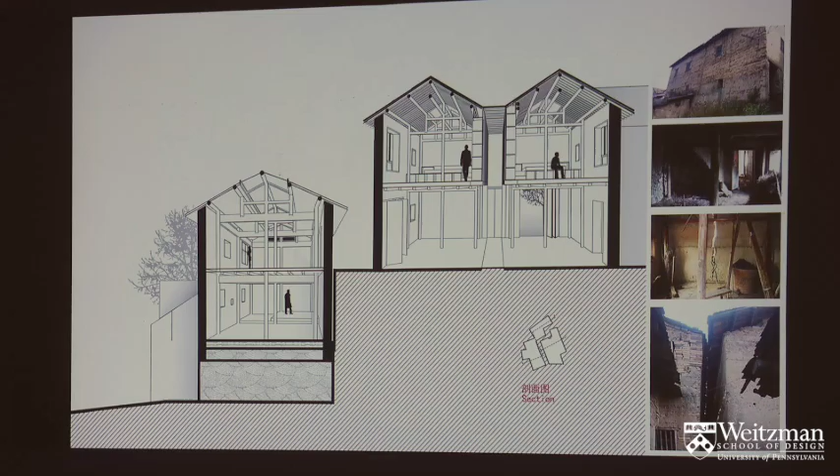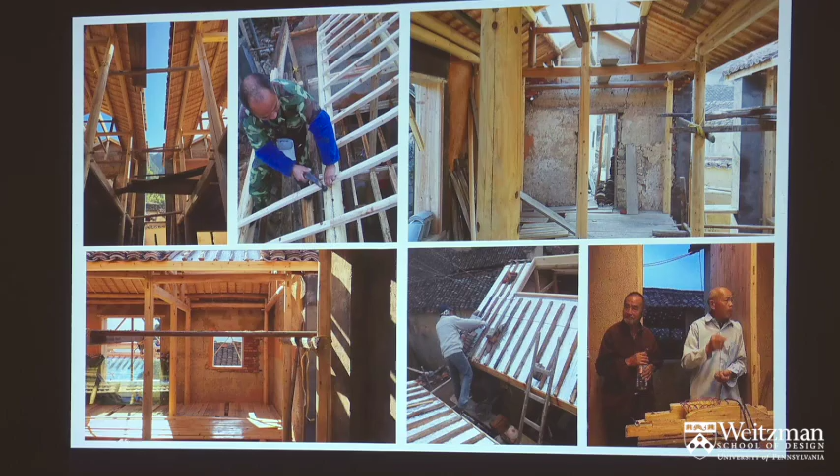So the community decided to demolish, but we made a counter offer to the county government with a new design proposal to preserve this cluster and change the interior, to reorganize it into a community space, into open space, because this traditional tenon and mortise timber structure allows flexibility for reassembling the interior structure.

This proposal made by us was done very quickly, in less than a week. We made a design proposal and brought it to the county level to offer it as a pro bono design project, but asked the county government to subsidize and fund the project for this village community to renovate this cluster of buildings instead of demolishing them.

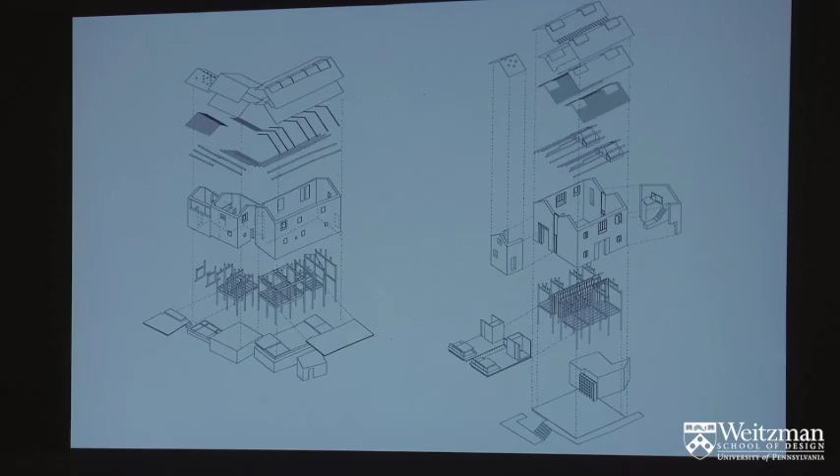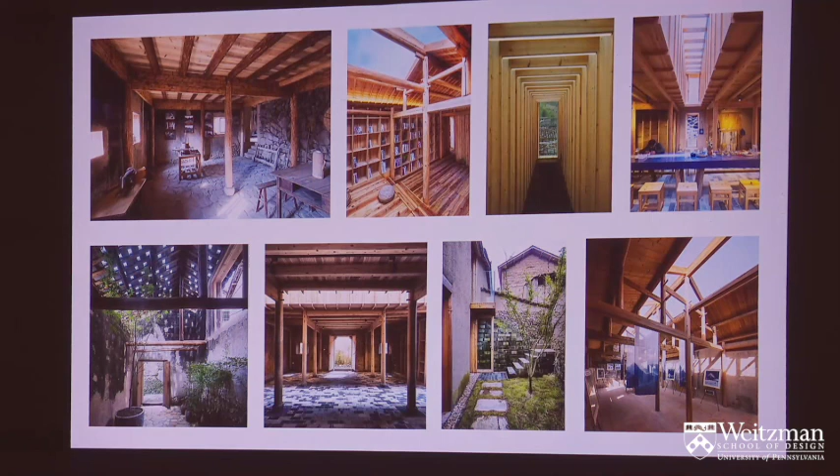The construction was done in the typical local building method, with the tenon and mortise timber structure and also with rammed earth, all local materials, carried out by the local villager communities. With this local vernacular building typology, houses are always built by the villagers and maintained by the villagers themselves. Everybody in the village can be considered a skilled builder or construction worker on this type of building.

This collective work with the community was able to reuse this cluster of abandoned space into a community space, a community meeting point at the entrance of the village, considered an important fabric of the first generation who arrived in this location and built their houses around 200 years ago. The upper floor, like some storage rooms, could be renovated into rooms for homestay businesses for visitors.

Later on, this building also inspired young villagers, two young artists returning to Songyang County from Hangzhou City, who started up this fabric dyeing studio in the Pingtian village.

This has become a very popular cultural and educational program locally in Songyang County, attracting children and visitors, especially young families bringing children for a weekend stay. These young artists also help local villagers produce their local crafts and sell them online with e-commerce platforms. So this village has become a very popular destination in the region.

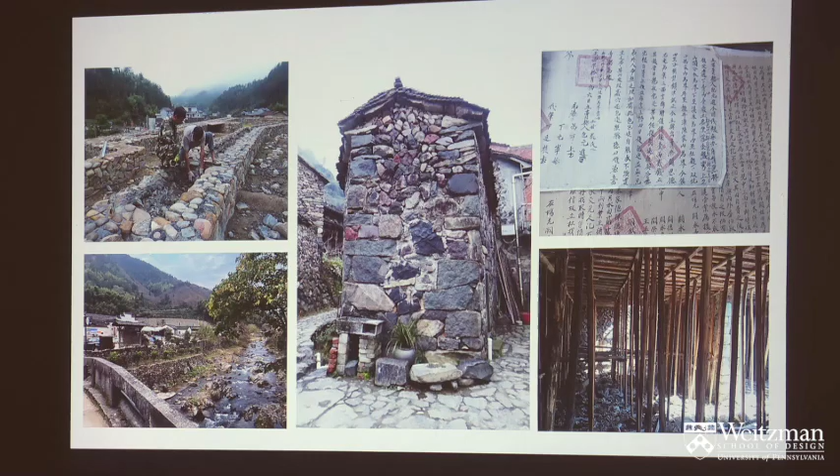Through this project to revive this long-lost masonry building technique, we were able to invite three local skilled workers. We could only find three workers with such building techniques, but through this project, they were able to train young villagers into masonry construction workers.

And the project also became a monument to showcase this Hakka indenture collection in the village. It's actually the biggest, the largest Hakka indenture collection in the entire nation. So this is very valuable local heritage and cultural assets as well.

But at the same time, it's also an archived document of this Hakka village's history and legacy.

So the space is conceived with the local masonry building techniques to work with the light, to work with the wind, and to work with the local environment. There's actually an existing creek on the site, and we include this into the space.

Based on local climate, it doesn't need to be a completely artificial space. It can totally open up to nature, to invite wind and breeze into the space, to let the creek run through the building. But it also creates an archaeological space for people to contemplate the legacy of Hakka indenture.

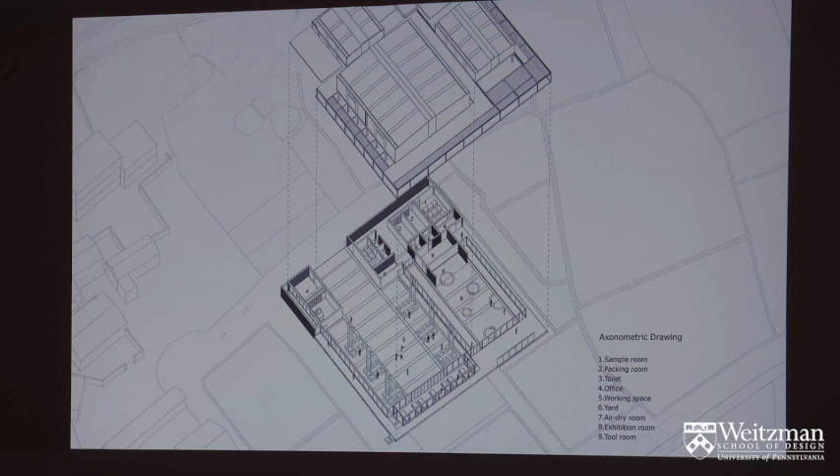So the idea to have a collective space, setting away from the village fabric, is to ensure all these issues can be solved with this new space as a collective space.

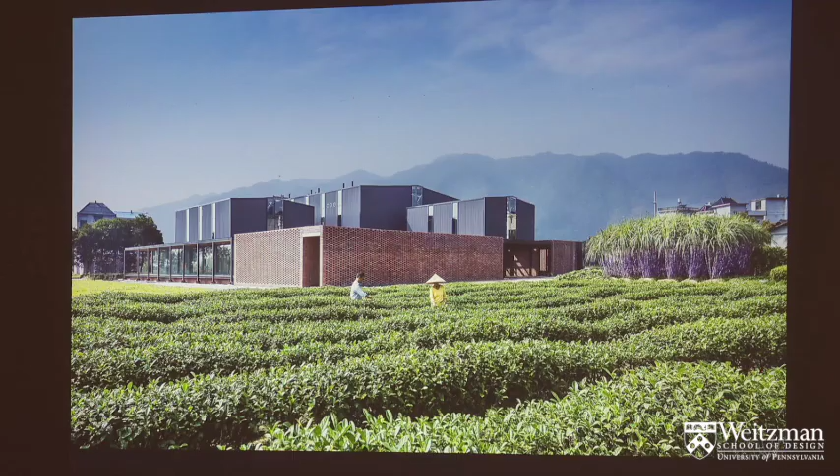And at the same time, it's also functioning as a community center to accommodate different cultural events. But what's the most important content happening in this building is definitely the cooking process.

This main central space is conceived as a central stage. The height, the sequence of the working stations, the geometry of the space, the layout of the chimneys are all decided together with these family workshops to identify how many family units are going to run within this space with such an intense production procedure happening in the winter season.

But at the same time, we also see that this is a striking live performance. It's a live museum to showcase the local traditional intangible cultural heritage. So this factory is also a live museum to attract visitors.

So now every winter season, I think it will start soon, in about a month or 5-6 weeks, they will open up this sugar festival. So the cooking will start again with this space running day and night, 24 hours, with 3 shifts.

And you can also see that this is a space where we also bought these uniforms online - they were $2 per set, we bought it on Taobao. Only for this color, making these cooking masters - they all have this. They are entitled as the cooking masters in the region, and become the actors, become the performers on the stage. And very soon they also become the local celebrities who are really skilled in this brown sugar cooking production.

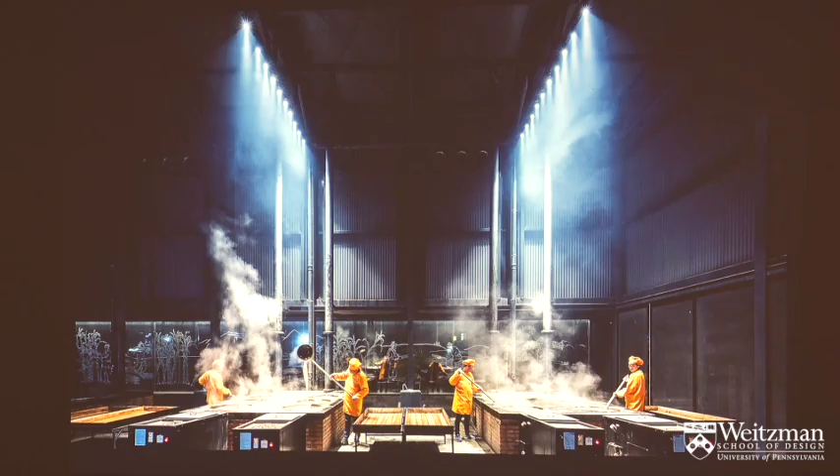So the space runs 24 hours, so even the lighting design is conceived as stage lighting. And together with the heat, with the steam, and also with the movement of these cooking masters, the space becomes a striking attraction during the winter season.

So the new space to upgrade production conditions and also to showcase this performance as a central stage to attract visitors would also increase the price of the brown sugar.

It has increased. A few years ago, what I got from the local community is that the price increased 5 times. But even by now, actually by last year, the price went up again. So now it's almost like 10 times of what they were originally selling.

But anyway, if you consider all these local made food, organic, very homemade food, they're limited editions, and with this, it's not like the mass production out of the modern factories. So this makes the product

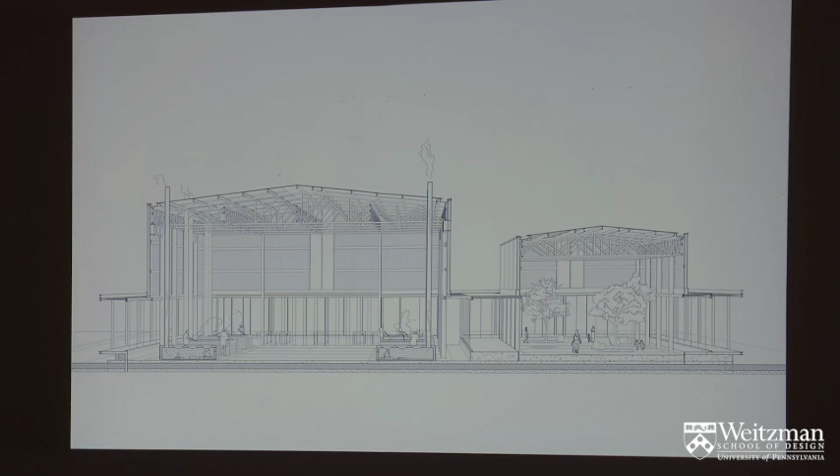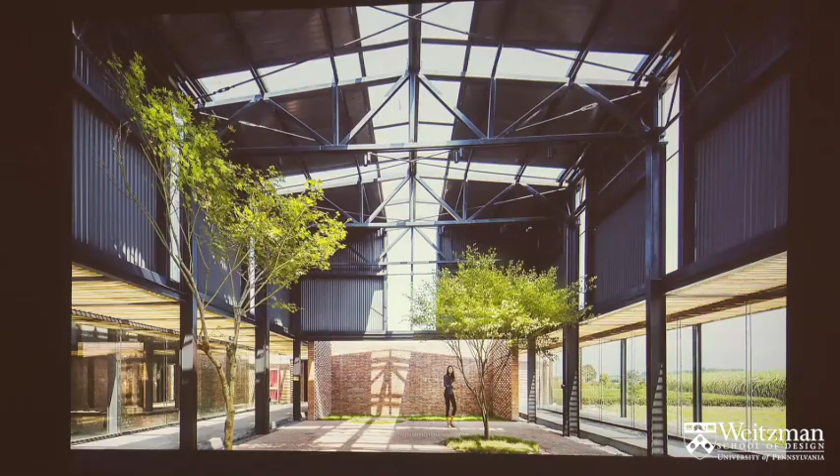definitely increase the value, the economic value, and also the cultural value of this brown sugar cooking as an intangible cultural heritage. And the space is also accommodating other programs for village gathering space, for visitors as well. And very often during non-production season, the space is also used for other cultural activities, for example, the local cultural performance or gathering events as well.

And the factory is run by the village community, so that means that they have the ownership of this production. They're not just the workers, they're the shareholders of this collective entity.

And in another village, Caizhai in the mountain, which is also a Hakka village, is known for the best tofu production in the region. So in this case, a new tofu factory is built at the entrance of the village. And this happened after the village community saw the success of the sugar factory.

So they come up to us with a new proposal for a tofu factory, and they already identified this buildable lot at the entrance of the village, and made a proposal of, they counted the needed square meters, the volumes of the space, and also the sequence, because of tofu production.

It's not like the sugar cooking space, which happens in one central compartment, but this is rather divided into different compartments based on the tofu making procedure, from soaking, grinding, cooking, deep frying, and then at the end, the tasting hall.

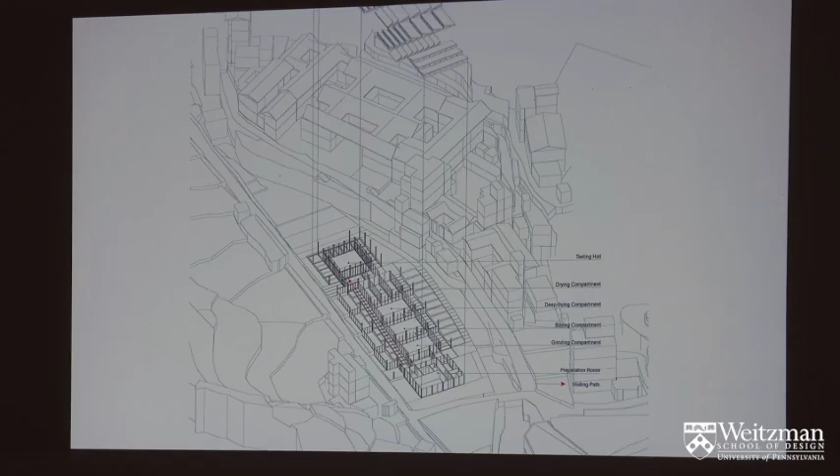So the space is like, with all these compartments located on this terraced topography, and each one is showing it's actually a production space, but again it's also a live demonstration of the traditional way of cooking, of making tofu.

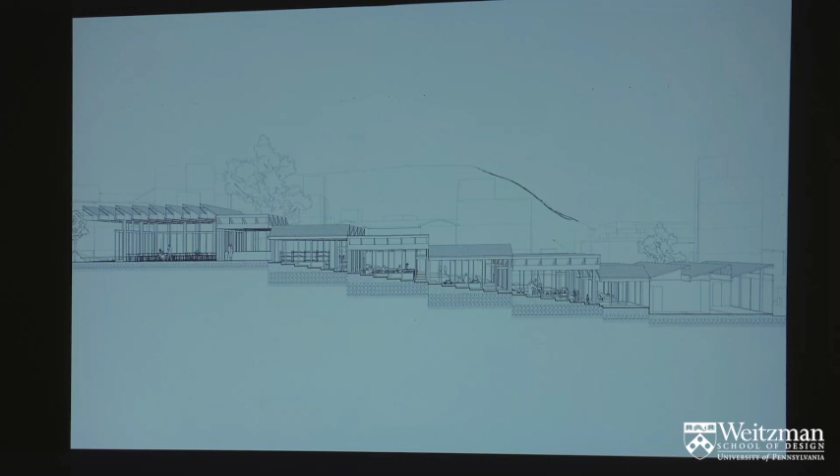So following this terraced topography, this tofu factory is like episodes of the traditional way of making tofu. So we also designed parallel walkways following this topography, but also following the procedure. So then you can observe the process of producing tofu, following all these compartments, and the space can also become the community leisure pavilion.

And at the end, you will arrive at the tasting space, the tasting hall. And again, this is also a multifunctional space that can work as a community host, hosting community events and different activities. We had a UN Habitat conference in Songyang, and one of the talks was actually taking over this tofu space as a meeting space for the conference.

But what's really fascinating is after the build of this project, after the realization, the village community was really inspired, and they brought up more initiatives. For example, they actually invented an educational program with all these tools scaled down for young children. So this is actually an additional cultural educational program, but also additional revenue for the village community, especially over the weekends or during holidays, when young families bring their children to visit the rural village and engage with this cooking and tofu making process.

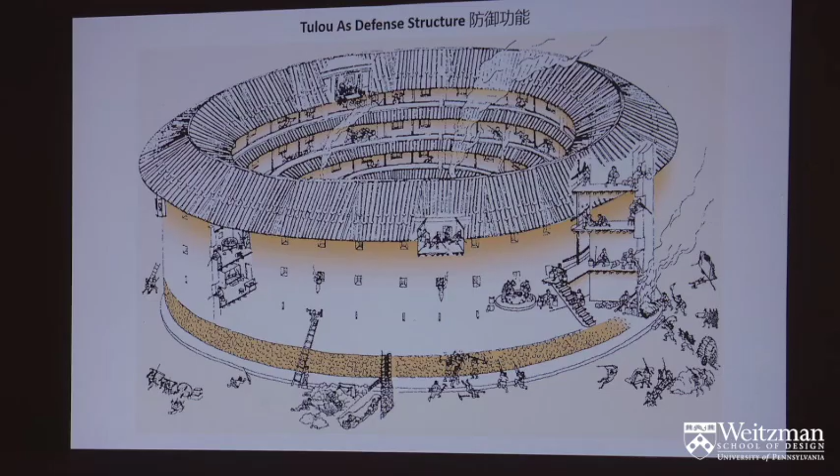A lot of them have been demolished. But the Tulou was built with very specific functionalities for defense. People would fight together against common enemies, and at the same time they also lived together.

This is a very modern concept of collective living, happening almost 1,000 years ago, since it started. The most ancient Tulou in the region has a history of 700 years, which is Yuchang Tulou in Nanjing County. So all this collective living allowed people to live together, work together, and fight together under very extreme social conditions back in ancient times.

But at the same time, it also built up a very rich cultural heritage and legacy with this Tulou region in south Fujian province.

But again, with economic development, many of the Tulou buildings have become vacant and abandoned. So this is really the current condition: thousands of Tulou have been abandoned, people moved out of this ancient collective living structure and built their own single-family houses, all moved to the cities, moved to modern apartments.

So we really consider this an urgent social and architectural issue with this vernacular typology.

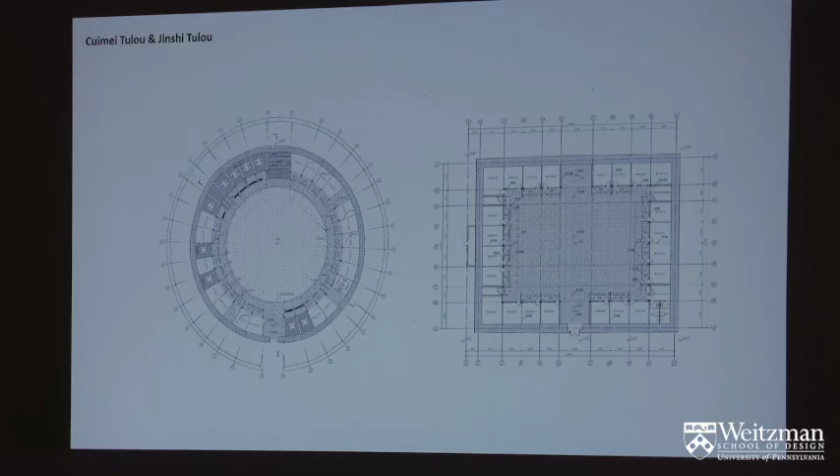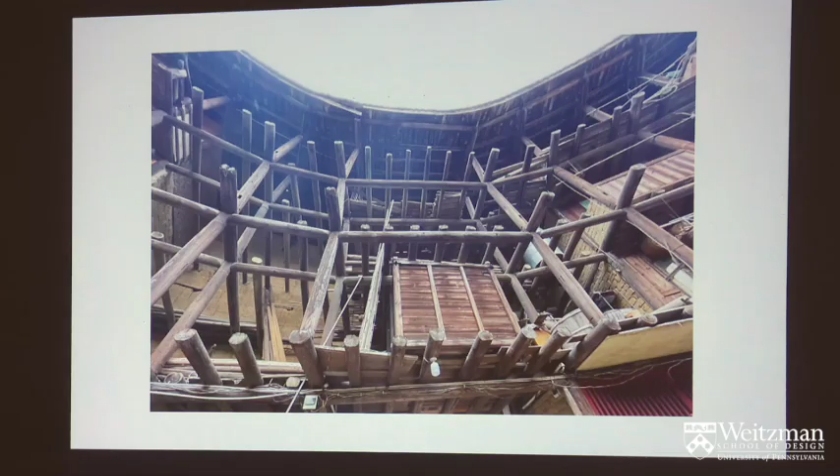But this was really not a pleasant condition when we first visited the Tulou. You will see that the buildings are not fully occupied, with a lot of units being vacant, and only 11 families are living there.

They didn't get enough support, or there was no sense of community or collective living anymore after most of the families moved out.

So the design proposal we made is not to rebuild everything, all the units, but first of all to connect the corridors. This is very important because all the families living in the Tulou buildings share the same corridors. So this is how it looks like when the corridors are connected or repaired.

The second step is to move the kitchen, the cooking part, out of the first floor, because every unit belonging to one family has the kitchen on the ground floor in the indoor space, the second floor as storage, and the third floor up to the 5th floor as bedrooms. But all these units share common stairs, normally 4 common stairs.

So that means that all of these families have to go through all these connecting corridors to meet each other, and also to reach their own bedrooms upstairs, which is a very intense kind of system, but also makes this Hakka family very close and strong bonding. It's a very unique and specific social system happening with these Tulou communities.

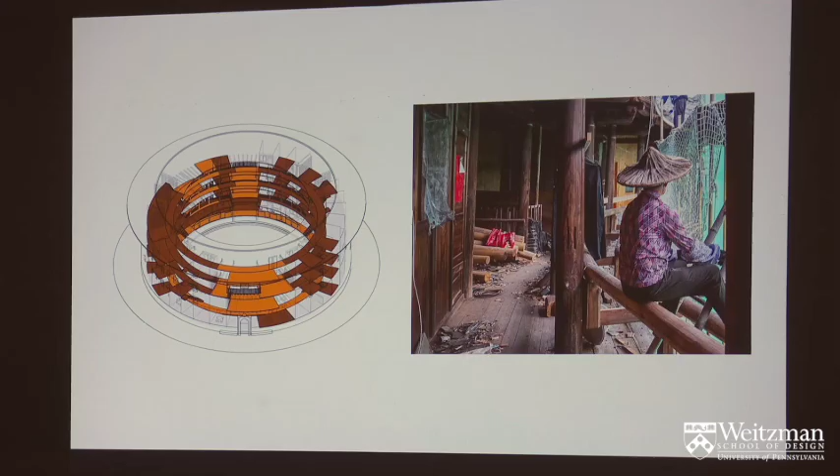So from this diagram, you can tell that all these voids, the vacant space, don't need to be rebuilt into the living parts, but actually the openness can create a new kind of community space or platforms to invite visitors. So that space can really become open space at different levels, to invite visitors to understand the local life as a meeting space, but also to open up new business potentials.

The reason the local inhabitants asked to move the kitchen out to the outdoor space is, on one side, because of the local climate, but also this exposure of the kitchen space on the ground floor would become a food stand for visitors coming to this Tulou.

And the space is also shared as a community common ground for festivals and for different activities and gatherings.

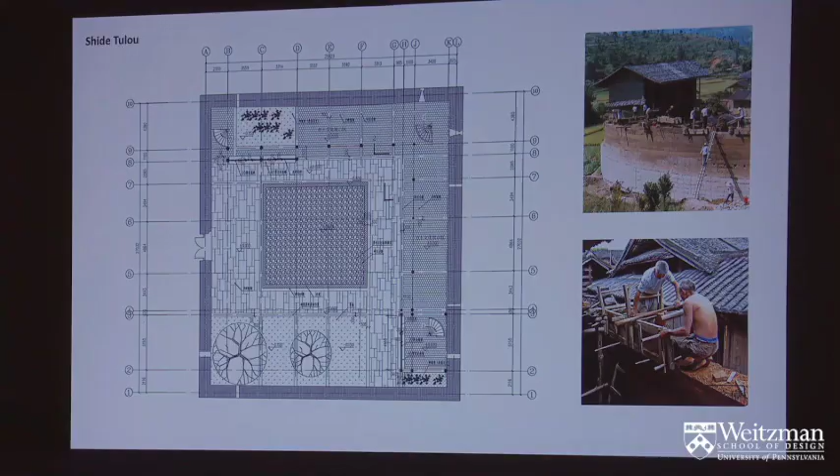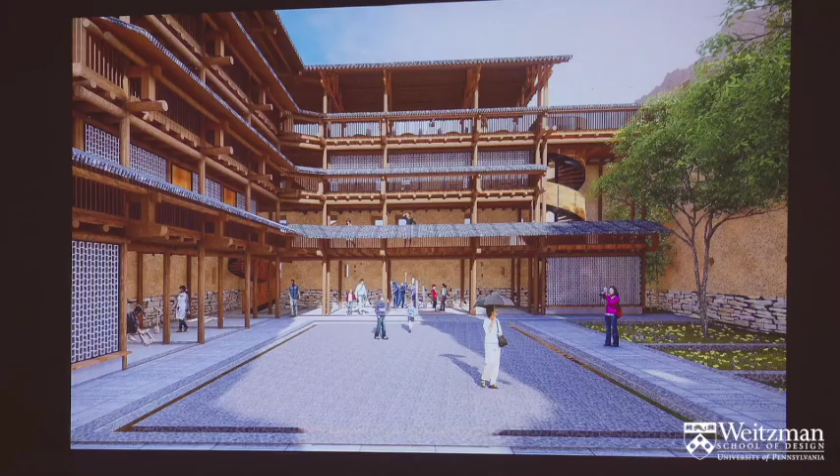With this Tulou, in the same village, it was burned down by fire over 200 years ago, so part of the building remained. You could tell that the rammed earth was already burned into these ruin conditions. With this Tulou, we were not asking to rebuild everything, neither the timber structure nor the rammed earth walls, but actually we were only repairing and renovating the leftover structures to create open space.

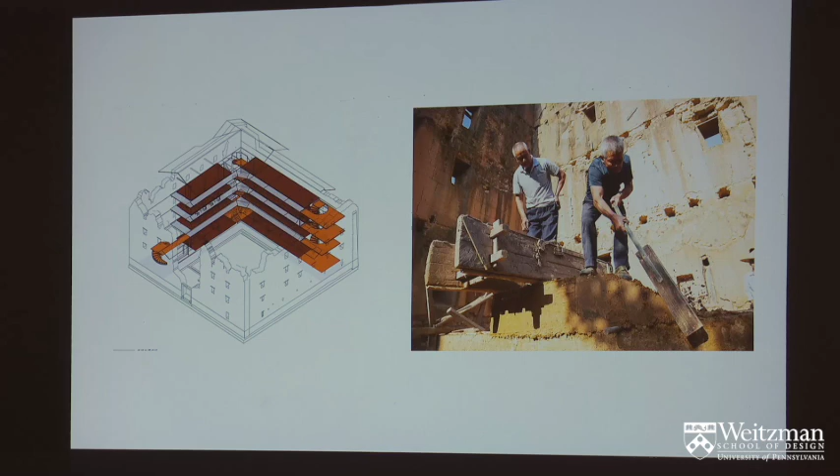At the same time, this Tulou is introduced with a new program as a Rammed Earth Cultural Center. It provides a platform for local villagers to showcase their rammed earth building techniques, and can also work as educational space for visitors to understand rammed earth construction techniques as a sustainable way of building. The leftover rammed earth walls become the monument or exhibition of the rammed earth culture space.

Another Tulou is actually collapsed. This was abandoned for over 30 years and collapsed at the entrance of the building. The trees also died when we visited this abandoned structure.

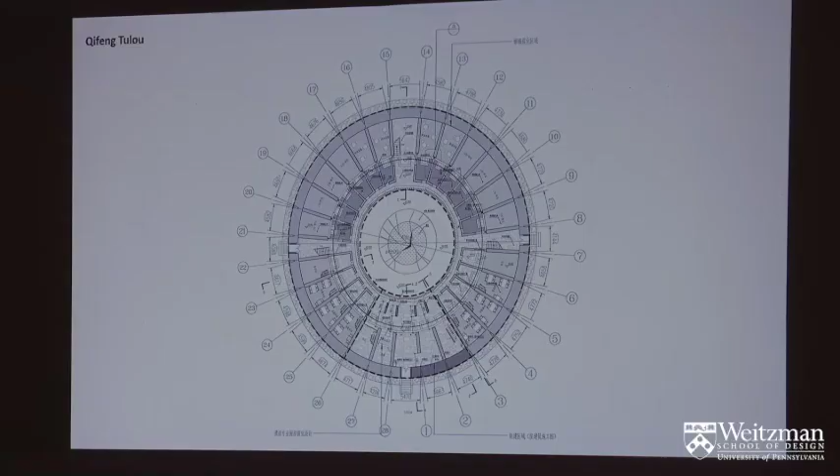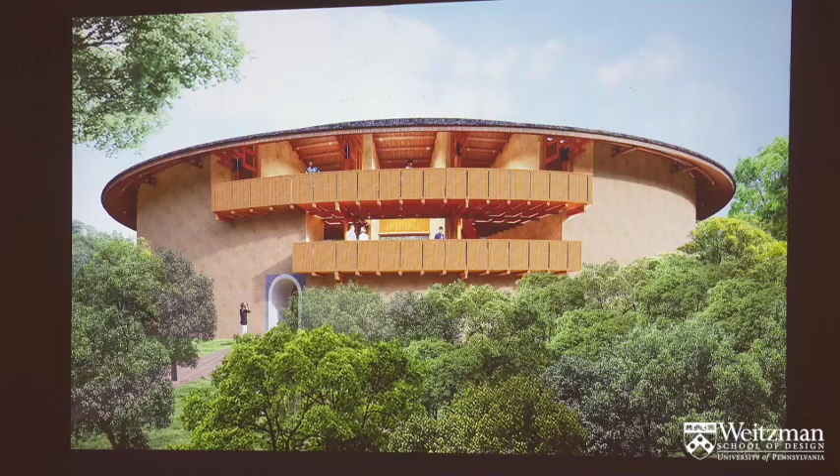But this actually becomes a new opportunity to introduce a lookout terrace working on top of the entrance ruin, because with the original Tulou buildings, under heritage building regulations, you're not able to open up the walls for larger openings. All these Tulou buildings were built for defense purposes, so all the windows are very small, or the facade has no windows at all. So this ruin makes it possible for this Tulou to build a lookout terrace over the entrance, because of the existing condition.

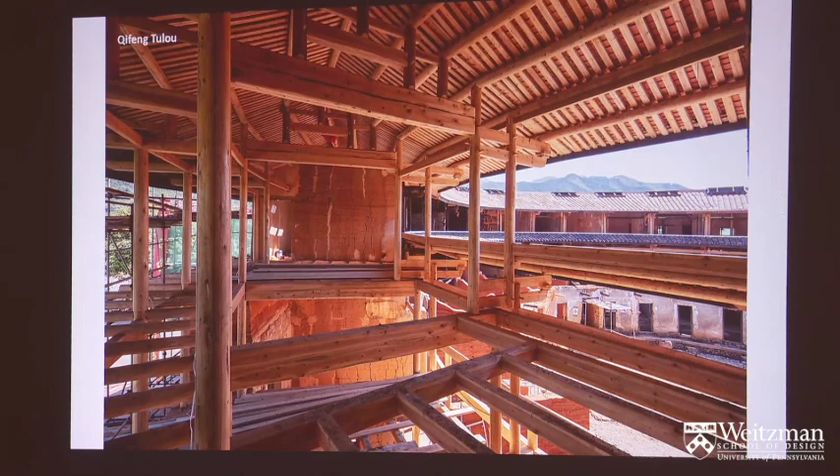So later on, this Tulou was actually going to be converted into Xianfeng Shudian, an avant-garde bookstore, which will open later this year. The design we are proposing only gives a framework to demonstrate that these ruined Tulou buildings can still be performative. Later on, each Tulou would have its own new program based on each context and specific conditions.

The overall idea is to prove that these vernacular buildings, after losing their original functionalities for defense and collective living, this sustainable structure with timber, with rammed earth, with local stone and tiles, can still work as a community space, or can still accommodate public or cultural programs and activities.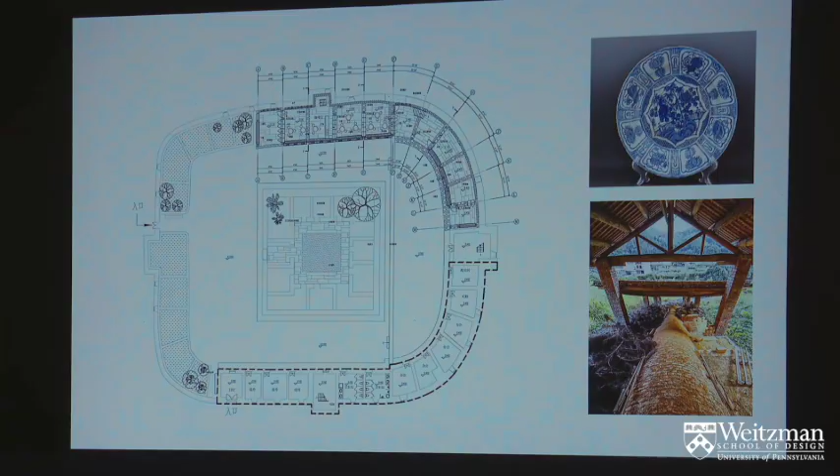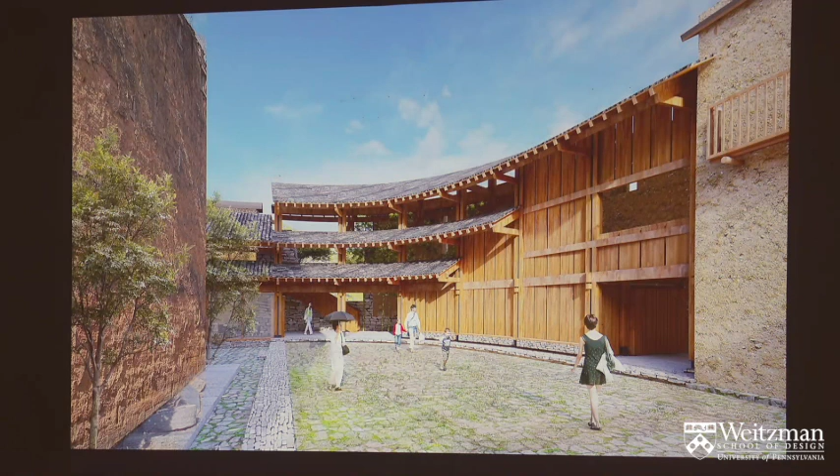With this Tulou, we also wanted to introduce a new structure system with CLT timber structure, which is modern timber structure that doesn't have the fire issues, but at the same time can continue this typology to create a dialogue with the existing leftover building, while also able to open up the space which would allow for larger space for galleries.

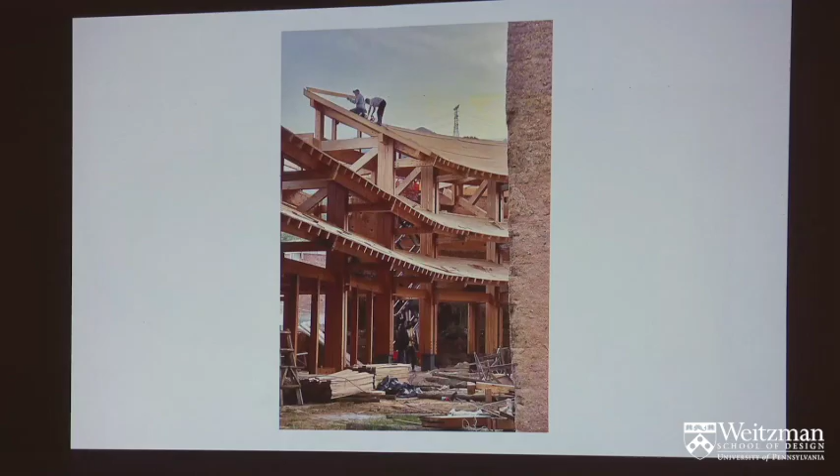So even during the construction, the local villagers started to gather in front of the building to take it as a pop-up market. So overall, we want to argue that ruin is a new opportunity, because it doesn't have to always be negative.

The ruin brings new potential, new opportunities for each tulou, that on top of a very strict system of this vernacular typology, the ruin happening in each tulou can create a new condition, a new space for each one, and later on can be converted into other public spaces or community spaces.

And then we also bring this acupunctural strategy to work on abandoned quarries. For example, this is in Jinyun County, which is next to Songyang County. Songyang, because of its flat land and because of the agriculture and the soil on the land and the agricultural land, so it was...

You see that in Songyang County, the main production is agriculture, but this geographical condition in Jinyun is different, because of the stony mountains. So in the past 1,000 years, most of the production happening in this region is stone quarrying.

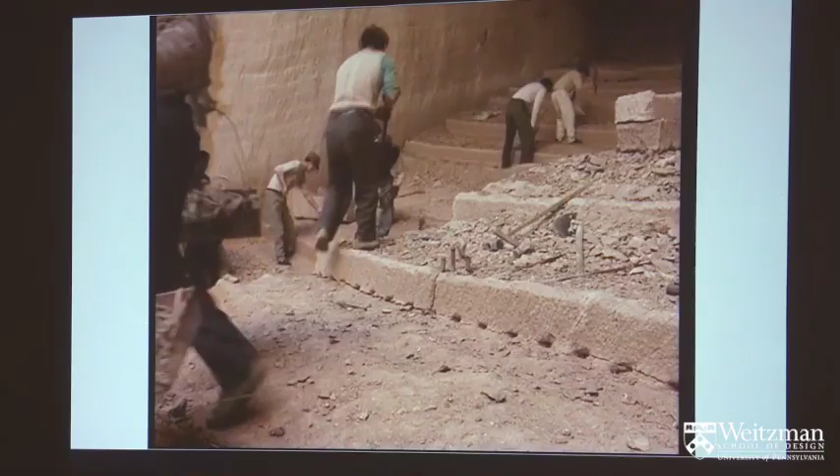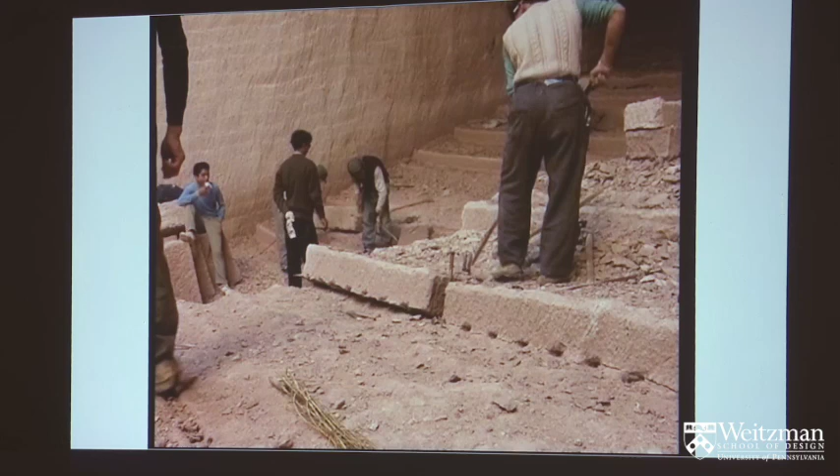So apparently it was a very intense, very harsh working environment, but still the local community had a very strong sentimental connection with quarry production in the region. This is an interview with a quarry worker.

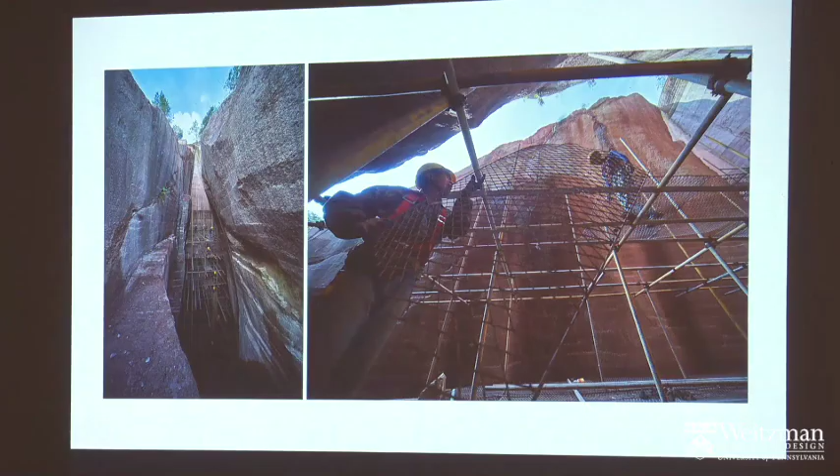So first of all, of course, we work with the geotechnical engineers to ensure safety reinforcement. And we were able to finish 3 buildings, still in the year 2021. All 3 quarry spaces were finished with construction within 6 months, including both safety reinforcement and the space reuse.

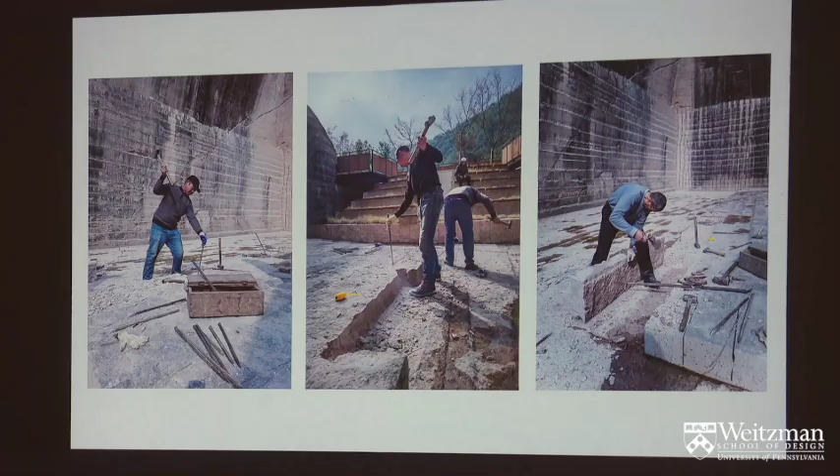So the first quarry space's program is based on the request of these quarry workers, as a demonstration site for their quarrying skills. Like I said, similar to brown sugar cooking masters or tofu making masters, these are the quarry masters - they all have this entitlement which they are really proud of. So this is a demonstration site to see how the quarrying can be produced, with this manual operation as a demonstration.

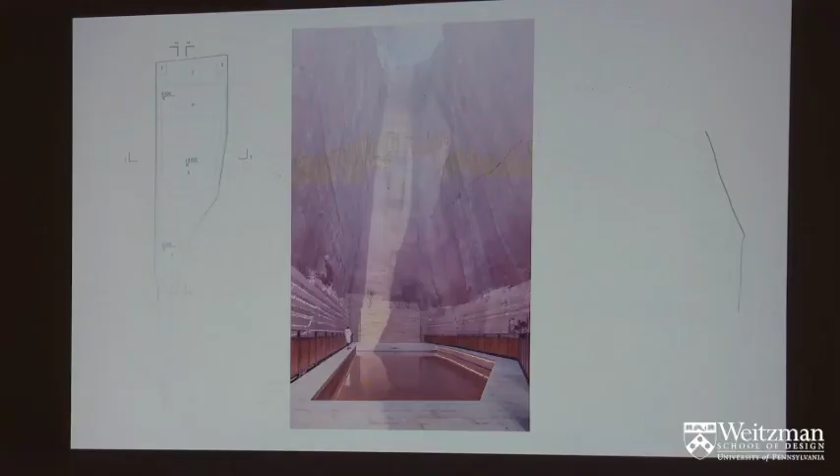But also this space serves as an arrival point for visitors. And then the second space, because of its acoustical quality, becomes a performance area for local young villagers or for traditional opera performance.

And then the third quarry is actually 2 quarry caves connected. The first one, you have to pass through these joints with the concrete safety reinforcement, and then arrive to the next cave, which is 38 meters in height.

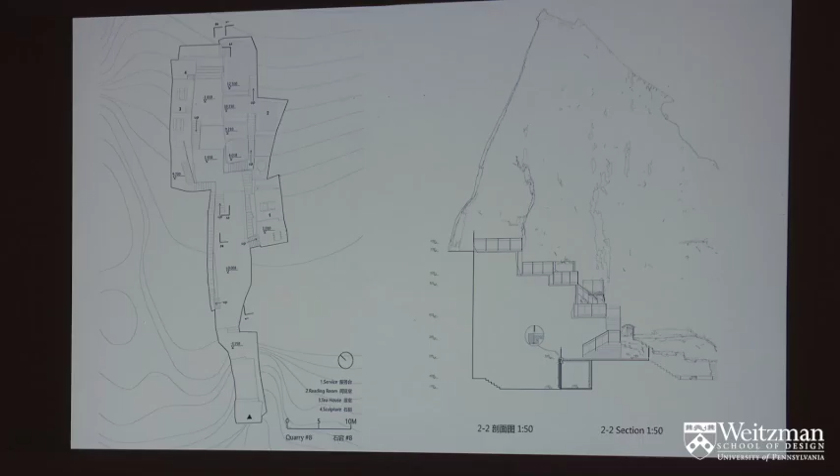It was also left over with the internal topography when the quarry was closed down. So you see the terraces and also the walkways, they were just production spaces, and also the pathways for the quarry workers to carry out the stones.

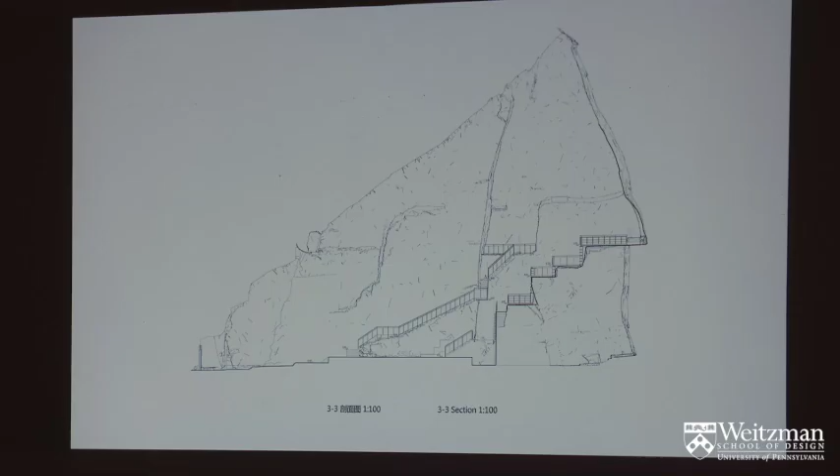So we wanted to take this internal topography as the existing, not only as existing conditions, but also as the traces of this leftover, of these memories dedicated to the quarrying legacy, that the space, this spectacular spaces carved out, created by the quarry workers through generations and by manual operation through very harsh, intense working environment, that these quarry workers were really proud of these spaces.

Mr. Liu, the quarry worker on the interview, he was the volunteer to supervise the construction site, and he would come every day to look after the process.

On opening day, many of the villagers were actually in tears, especially these older quarry workers.

So you would see that we were not trying to take the quarry space as a site, as a topography, but rather we take it as an existing architectural space, and how we can introduce a layer of trace to introduce the human scale in contrast with the magnificent scale of the quarry space, but also to provide a landing ground for visitors.

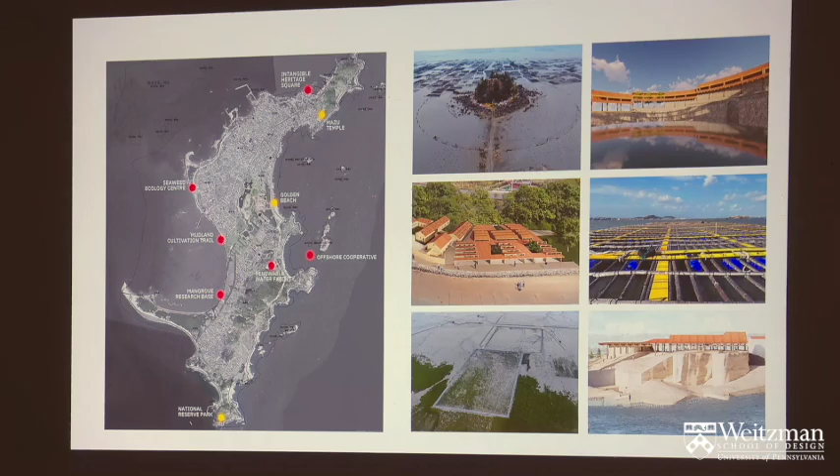The first one is the Seaweed Ecology Centre. This is the program where we just met a fisherman on the beach working with the fishing net, and we asked him about how he makes a living on this island. He brought us to the seaweed cultivation belonging to his home village.

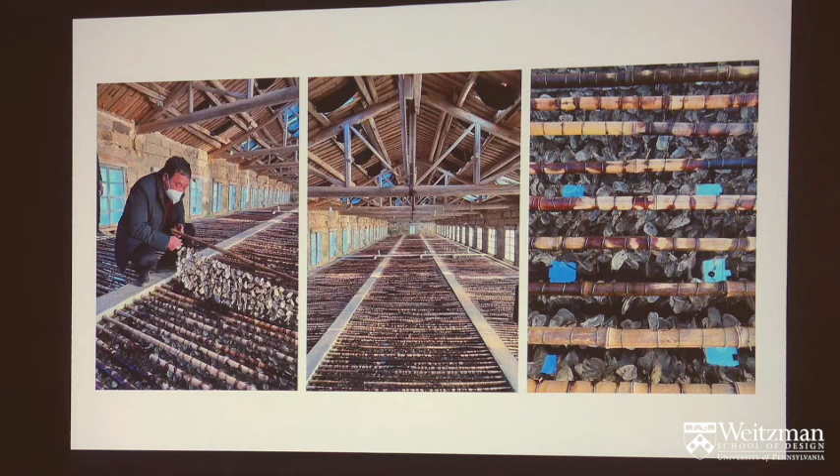This is a seaweed cultivation happening on the west part of the island, on the mudland. These are the spaces for a seaweed incubator within this structure—really beautiful, fascinating structure with the seaweed seeds. We call it baby seaweed, attached to oyster shells and soaking in the ocean water. This is the incubator where the seaweed grows for 8 months before being transported to the mudland.

This is not architectural, but really fascinating knowledge that we learned from the fishermen on this island—how they make a living with this very specific local ecological condition, creating a phenomenon on the mudland with these beautiful seaweed cultivation structures and the incubator space.

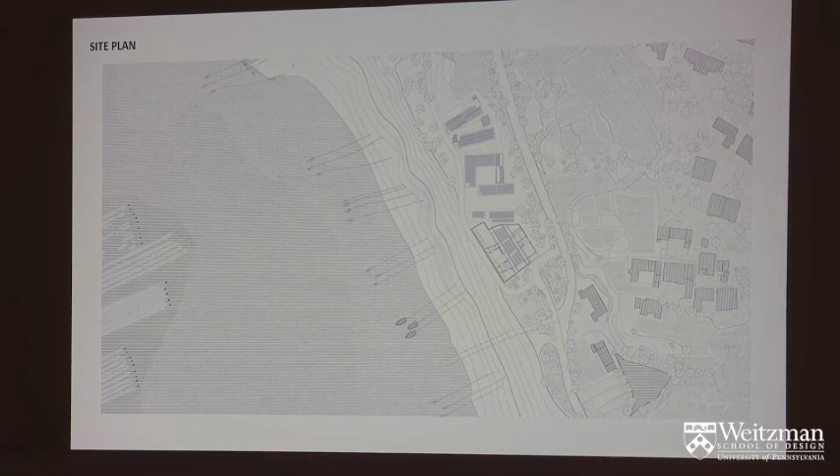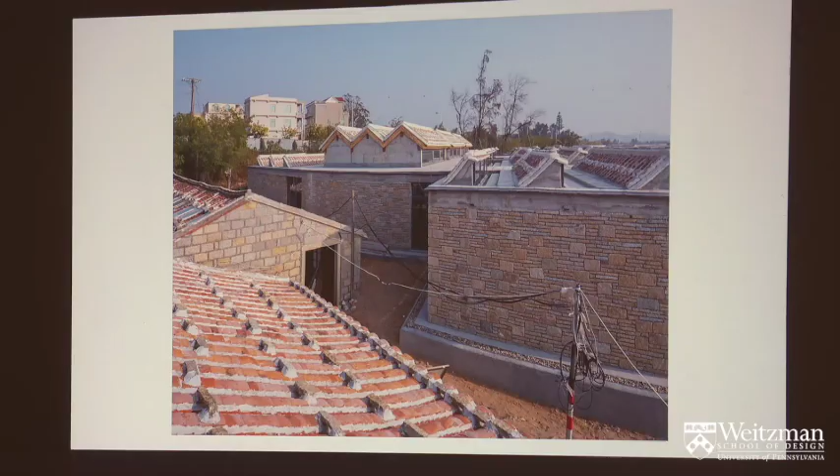This instantly inspired a new space on this location, to take some of the incubator spaces and integrate them with cultural and educational programs. So on one side, the building will face the island and the ocean, looking out to the ocean, and on the other side, it connects to the village fabric, to the community.

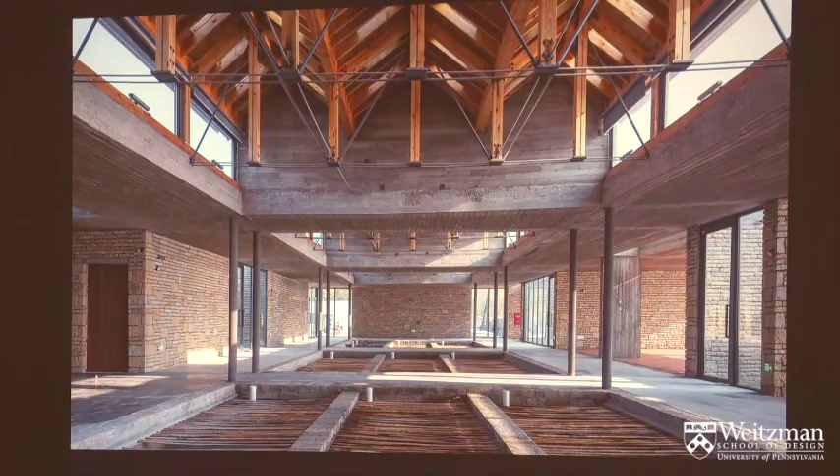The central space accommodates this seaweed incubator, the pools, the silent space as a center for production. That's a new space for cultural programs to look out to the ocean, but the central space functions as the incubator or ecological center, similar to a factory—though here it's a different type of production, different type of economic resource activity happening.

And the structure, even the skylight, is based on the production requirements, to monitor the light, the amount of light coming into the space.

On the other part of this island—this is the west side—the east side is the mudland, and the west side is the real ocean water, which could drop to over 10, 12 meters deep.

Here you have the kelp cultivation, and also floating bamboo islands with oyster and abalone cultivation underneath the water, or fish ponds—artificial fish ponds in the middle of the ocean. So there are different types of aquaculture.

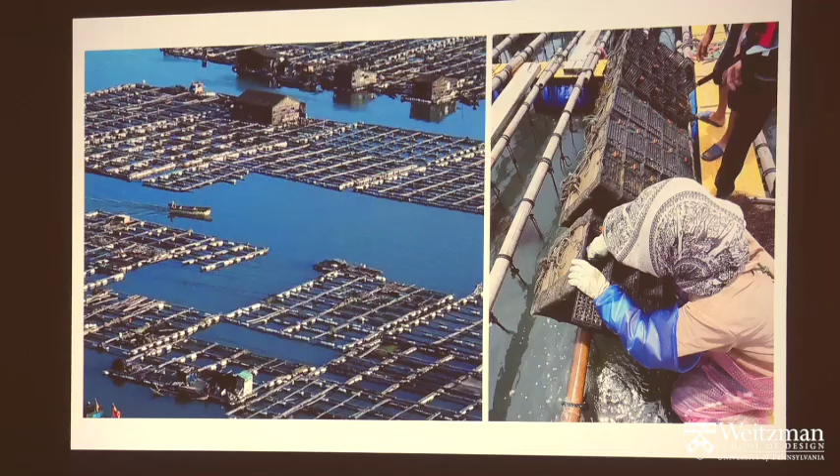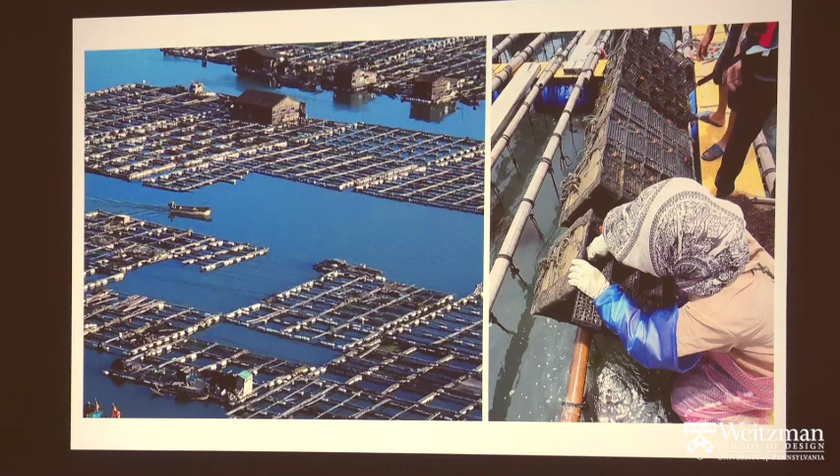This was always very fascinating knowledge—even happening in my home city. I've been visiting the island since childhood, and I never knew this knowledge of how people make their production, make their living. Of course they get the best seafood, the freshest seafood from the island, but you never realize how people made this production through the rhythm of nature, through the pattern of the ocean. That was really an inspiring process.

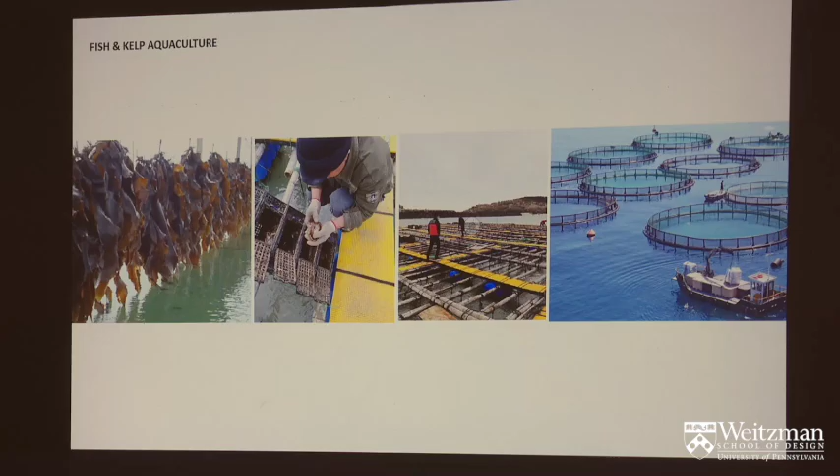We immediately decided to work with the existing typology of this floating bamboo structure, bamboo island, to conceive a space integrating kelp production and oyster production, which would actually be environmentally friendly for the ocean water, absorbing inorganic CO2 and carbon, and also integrating with fish cultivation—because by recent research, the combination of fish, kelp, and oyster will reduce pollution to the ocean water.

This isn't very difficult to understand, but fishermen were so used to one type of production, either kelp or fish. Now the design is proposed to include and integrate all these different types of production together, as a strategy to reduce pollution.

This will automatically become a research platform, because local universities will always send students to this region for aquaculture or ecological research.

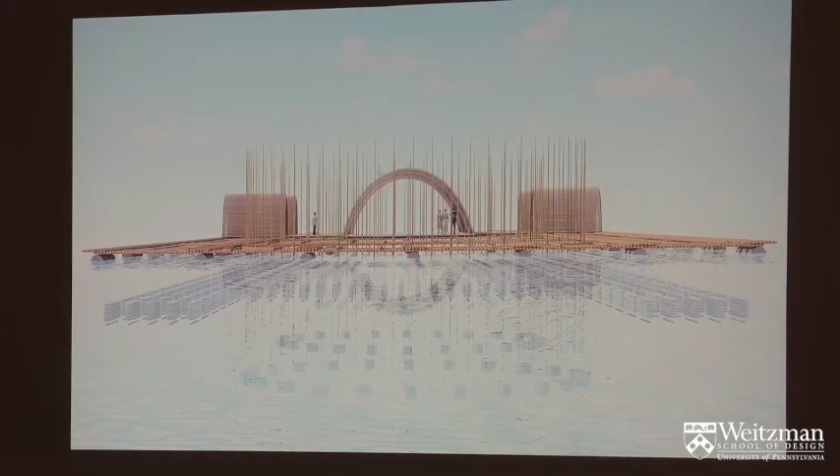So we also introduced this space not only for the fishermen, but also as a shelter for visitors, mostly for researchers and young students. So this actually becomes a structure to integrate environmentally friendly aqua production and the research and educational program into one structure.

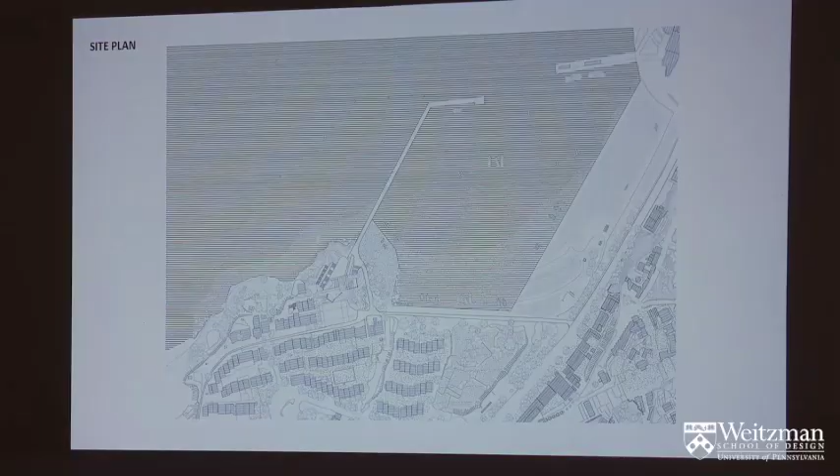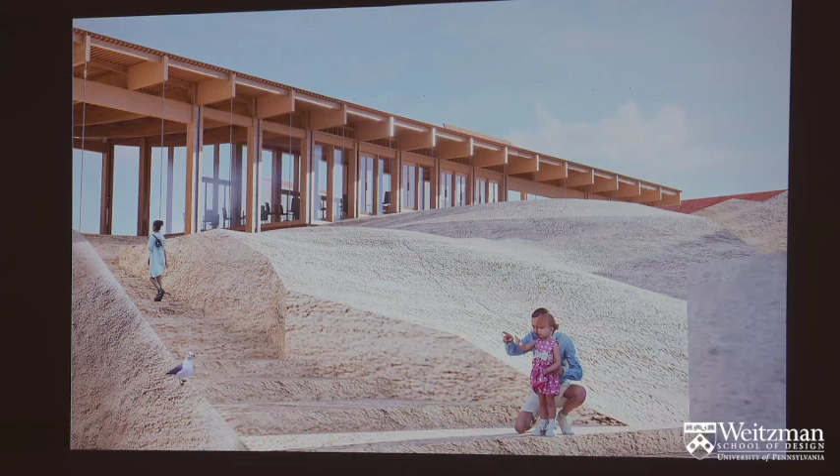So this was the testing phase. And another community plaza—when the fishermen return home after their fishing process, which starts very early at 3-4 a.m. and returns before noon, they would always pass through this community plaza. So here, as an arrival point, we wanted to introduce a space that is as an entry point, a gate, but also an open space to welcome them home from their fishing work every day.

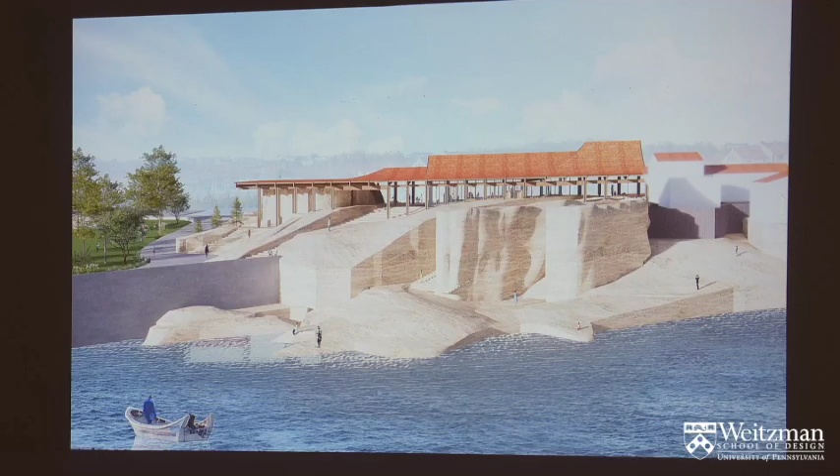And so the space is actually located on this cliff next to the ocean. The design idea isn't to build a new space, but rather to take the existing space in between the cliff and create a space there. The space would also change depending on high tide and low tide. So our design is only to introduce a layer of roof to provide an entry point, a gateway for the fishermen returning home to their community plaza.

So this is again a light structure, but here the architectural space is really in between—it already exists in between the cliffs, and it's really based on the high tide and low tide of the ocean, which could be 8 to 10 meters different with the tides.

And this project is the mangrove research base. We were looking—okay, now we're back to the West Mudland. This was really a difficult project because this fish pond was closed down. This is actually a cultivation pond for clams and crabs, which was closed down because of a mangrove plantation along the coastline, part of a national ecological restoration, coastal line ecological restoration policy, happening in all these coastal areas. So because of this mangrove plantation, this cultivation pond was abandoned for 2 years, closed down and abandoned, and eventually replaced with this mangrove plantation.